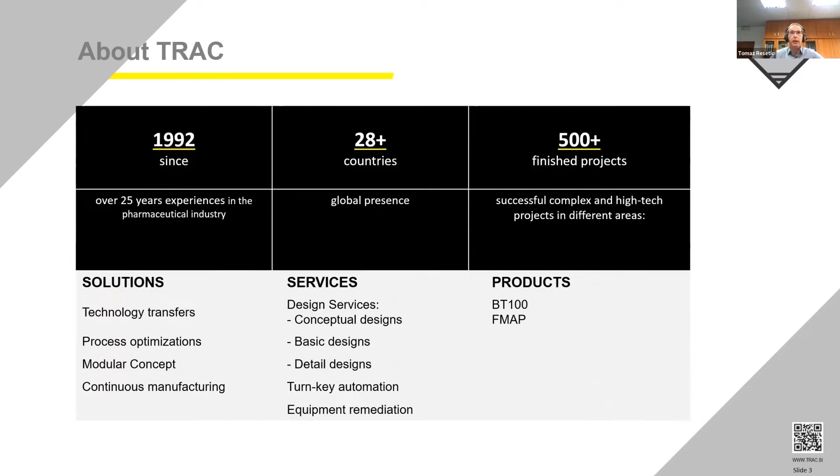We at TRAC are constantly searching for innovative solutions for our partners, and that's what I will present today - what was discovered in our journey to a better world and better automation. We consider ourselves an intelligent automation company, meaning we provide solutions which orchestrate users, tasks, systems, and robots, depending on the particular business needs. We have established long-term, trustful partnerships with our customers and successfully finished many projects around the globe. Our vision is to be the first solution provider in the field of automation and robotics.

With that being said, let's move on to the presentation. This slide is just to quickly summarize some of the most important benefits of modularity.

Bioprocesses are becoming more complex than ever. Therefore, greater effort is required to define, implement, and validate automation systems. Modularity plays a big role here because it allows complex processes to be broken into several smaller, independent processing units, each going through its own validation procedure.

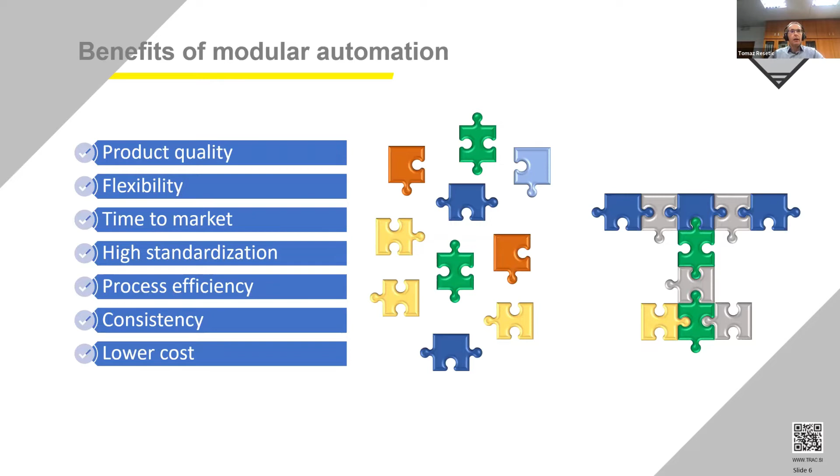Modular automation is not only applicable in manufacturing processes, but also in other stages in pharmaceutical and drug development, like preclinical, clinical trials and development stages. This is particularly true for ATMPs, where more or less, from our experience, the same equipment is used for development and for regular production, only that in regular production we have a larger number of equipment due to capacity requirements. So we just want to show that it's not only manufacturing process, but also early stages. As of today there are more than 1,000 products in different clinical phases, where this modular automation can play a big role.

Another example of applicability of modular automation is preparation of analytical samples. Each phase of preparation can be presented by each specific module. Modularity allows configuration of these modules based on required steps in sample preparation. Modules are treated like small units with clear in and out margins, with or without their own control logic. The flexibility that users get with this approach is enormous, particularly important for research and development organizations.

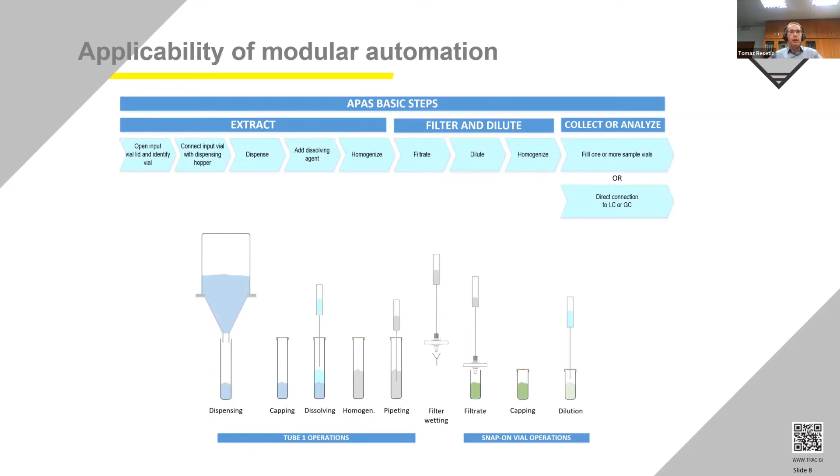Now let's look at the current status of this modular concept and modular technologies. Adoption of modular automation is still challenging. Manufacturers, suppliers and software developers are facing integration hurdles and regulatory challenges. So there is a lack of industry-wide standardization.

Of course, there are some initiatives towards standardization of modular systems, like VDI NAMUR 2658, or MTP as we call it shortly. There are some initiatives from the BPOG group and others. NAMUR MTP is currently in draft version, and is widely supported by the industry and associations like ISPE and the Open Group. Some big names like Siemens and ABB already developed orchestration platforms based on this NAMUR 2658 standard. Some have their own, like Cytiva's Flex Factory, and so on.

But all these solutions are targeted more or less to new manufacturing sites and equipment, and are often very complex. The reality is that there is a lot of legacy equipment in the field, which is still used in production processes and will continue to be used in the future. So there is still no critical mass of modular standardized equipment on the market to allow wide adoption of modular concepts. This is the real challenge we are facing today. And the challenge is how to bring this modular automation to real life manufacturing, where there is a lot of legacy equipment not built to modular automation standards.

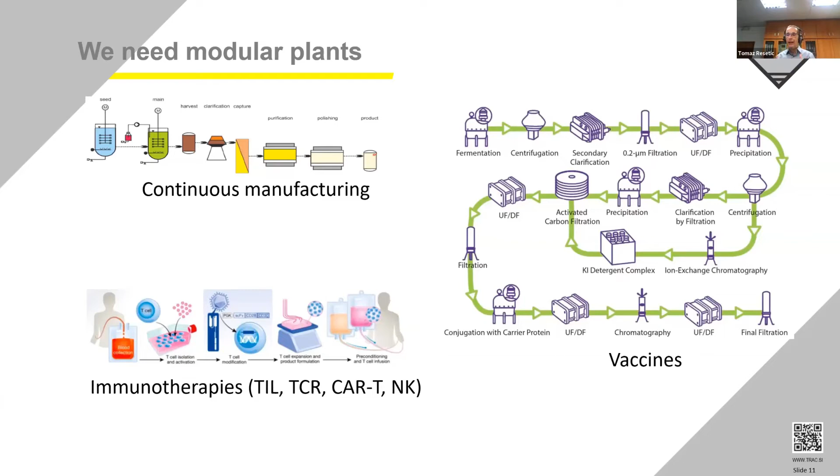So modular design can play an important role, but is modularity feasible? I would say that for new factories where you plan upfront to build a modular plant, it's feasible. But what about existing setups with a lot of legacy equipment, as I mentioned before? This is a key question. There is an enormous amount of legacy equipment, in most cases fully operational and standalone equipment with its own user interface and most of the time limited connection capabilities.

So the challenge is how to make this legacy equipment modular. Modular means standardized, integratable, and so on. The key word here is decoupling. We have to make physical separation of existing equipment into independent and manageable units called modules. In most cases, there are individual processing equipment, these modules. So take a piece of existing equipment, convert it into a standard module, and use it as a plug and produce concept. Once modules are clearly defined, they can be integrated into a robust and fully compliant process.

So at TRAC, we came with an innovative solution how to make this legacy equipment modular. We put together a little hardware and software to create a wrapper around the legacy equipment, which you can see on the screen. This wrapper behaves externally as fully MTP compliant package unit, while internally communicates with original device controller and externally exposes all its properties to external orchestration system.

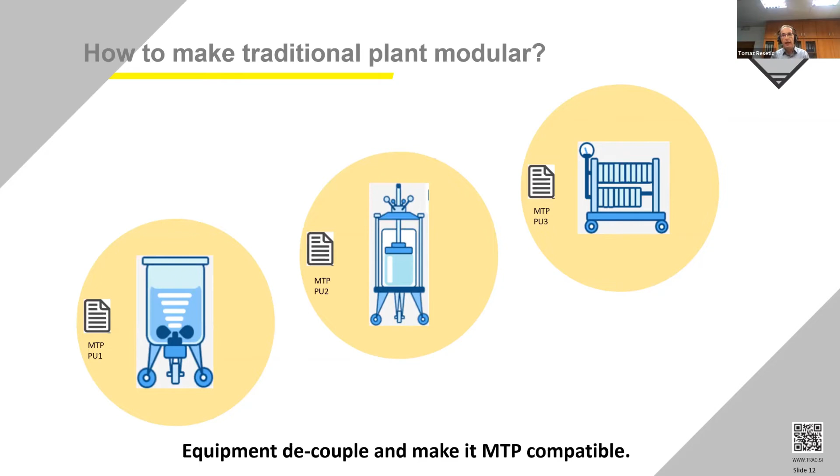We can see on this slide a typical cell therapy process where off-the-shelf equipment is first transformed to comply with modular standards before it can be used in manufacturing process. So we see a funnel of different types of equipment which is used in a standard CAR-T or whatever manufacturing process. And by providing these wrappers around this equipment, we unify interfaces, we simplify user experience, we reduce the necessary level of training for the operators, and so on.

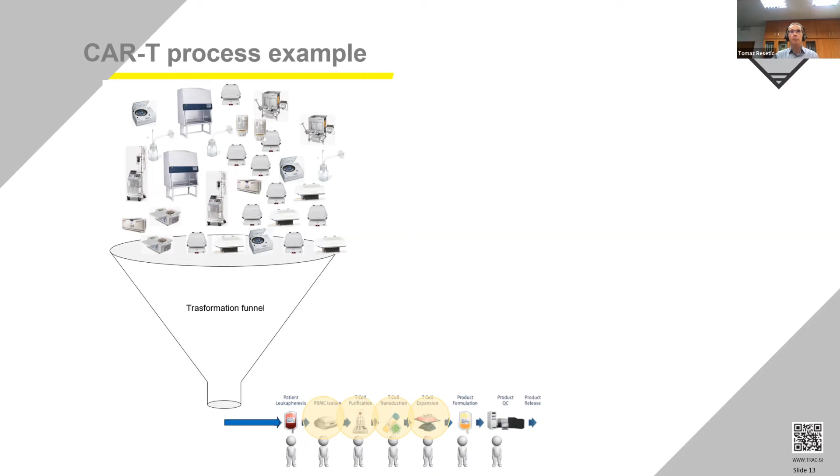Once we have these modules properly separated, properly wrapped around this and make them compatible with MTP standard, the only thing we now need is orchestration platform, which allows simple and unified interface to all connected modules. So at this point, I would like to introduce our new product called FMAP, which stands for Flexible Modular Automation Platform.

FMAP is a platform which supports modular automation through MTP-based modules description. So it's a key advantage compared to others is that it supports modular and legacy equipment. And it also supports hybrid configurations, so legacy and MTP. Combination of FMAP and our novel concept of FMAP wrapper brings plug and produce concept to reality today. And I will not repeat at this point what all the features of FMAP are, but typical that you expect from an orchestration layer like that.

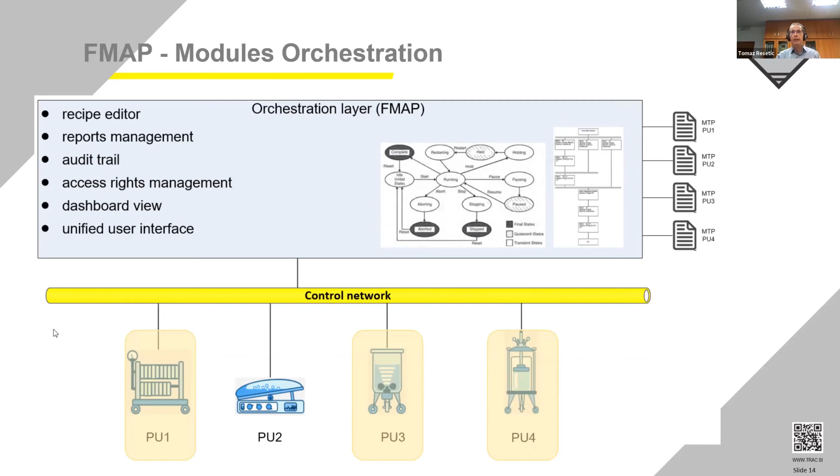Now I move to next slide. So on this slide, I just want to explain a few more things about this modular product and advantages. Each module has, as you can see here, a corresponding MTP file, which describes all properties of that module, so visual properties, operational properties, and so on.

MTP files are imported into orchestration platform where a repository of available unit operations is created. Normally, we can describe each process as a set of interconnected unit operations. Graphical representation of these interconnected unit operations is called normally sequential flowcharts, and you can see one on the right side of this slide.

Our platform allows a user to, in an intuitive and simple way, configure a sequential flowchart of their process by just drag and drop available operations, which are extracted from the MTP files visually, drag and drop them on your working dashboard, connect them in a proper way depending on your process. Then the only next thing is that you click on each operation, configure parameters, and you're ready to go. So this is very intuitive and easy to configure your process.

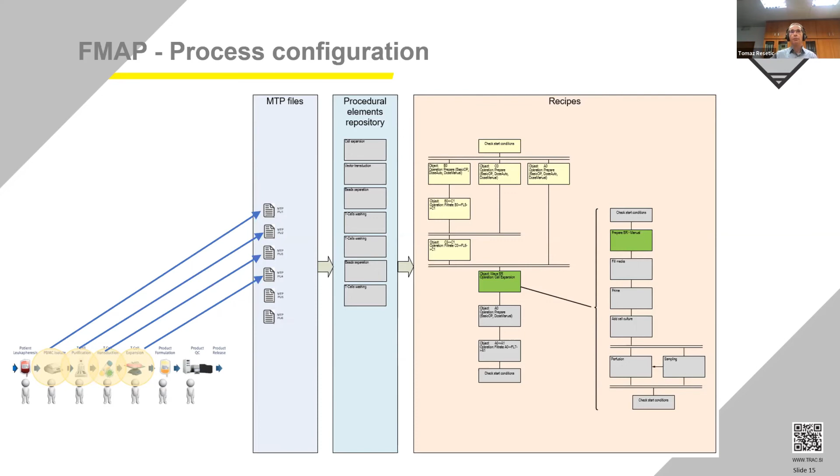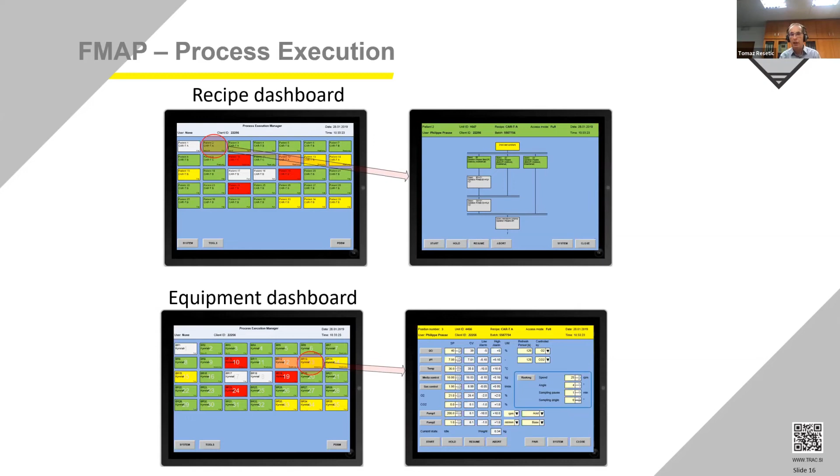Another type of visualization is the equipment dashboard, where in contrast to recipe, each icon represents a piece of equipment in your working environment. You can quickly see the status, and you can dig in deeper to manipulate this piece of equipment, or see the parameters it's currently using for its run. On this next slide, I want to show even more graphically what this means.

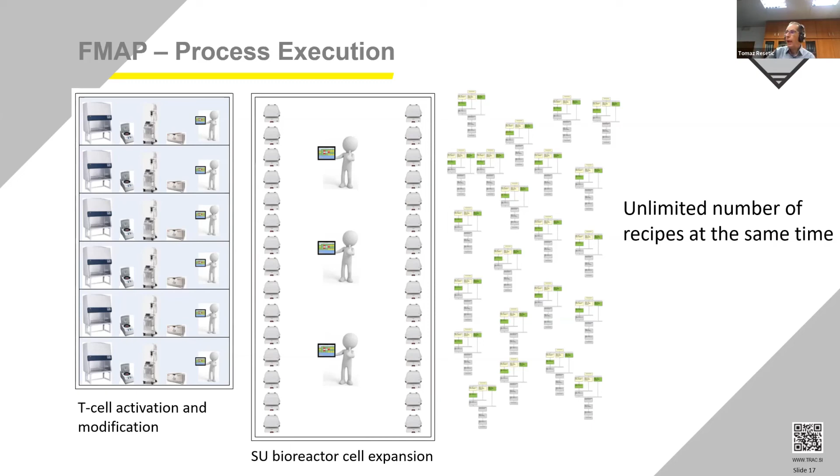Okay, with this I will summarize. Today I talked briefly about the benefits of modular technologies and the current challenges for wider adoption within the manufacturing industry. I also shared an innovative solution for how to make legacy equipment, which is here and will stay here for some time, modular and used in flexible configurations. I hope you enjoyed this presentation, and I believe the slides will be available for the audience after the event. Thank you so much, and I'm available for any questions in the next few minutes if you have them.